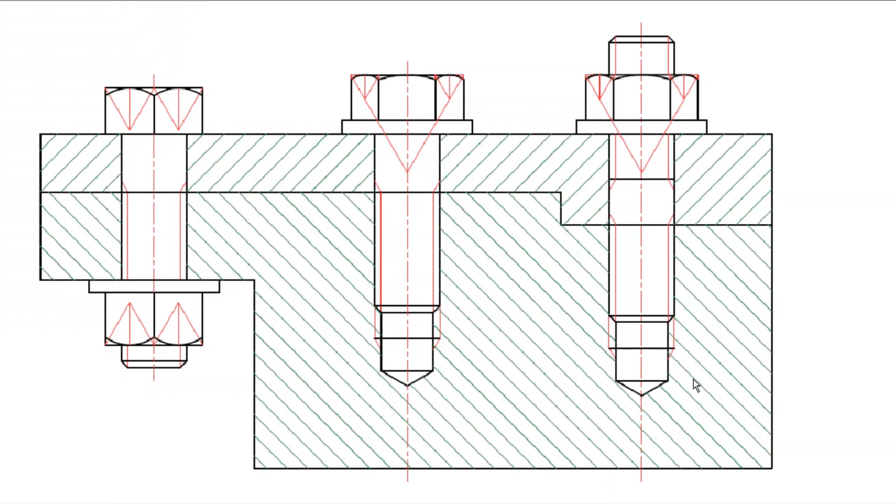And then next to it we have what we call a stud assembly, and a stud is basically like a bolt, but instead of having a bolt head on one side, it's got thread on both sides. It screws straight into metal part B, and on the other side you also have a washer and nut, and you can of course see the difference in the top views.

Now in the top view you can see that the bolt head is just a circle with a hexagon around it, outscribed, and the same here with the set bolt assembly, except you can see the washer going around it, which is bigger than the bolt head. And then next to it here we have the stud assembly.

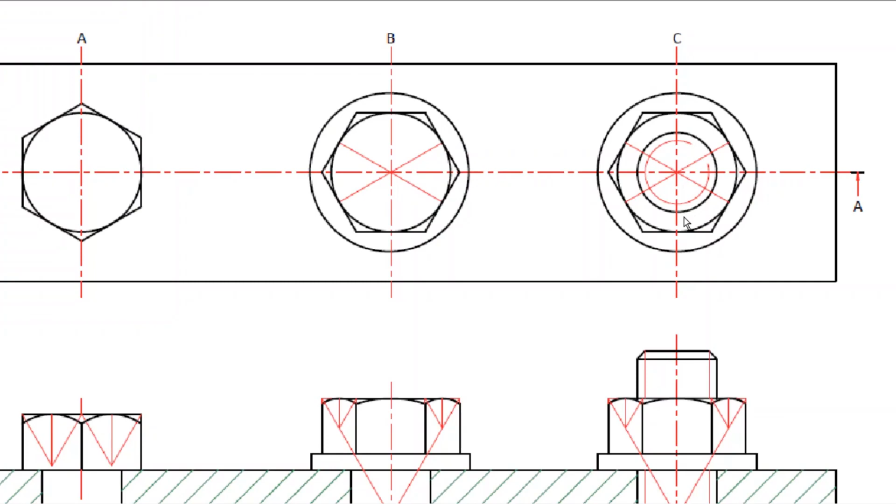If we zoom into that one, you can see the thread. And typically when you have outside thread, you have the break on the inside circle there. The break can be anywhere as long as you have it. And of course the thread is less dark than the rest of the bolt head and washer.

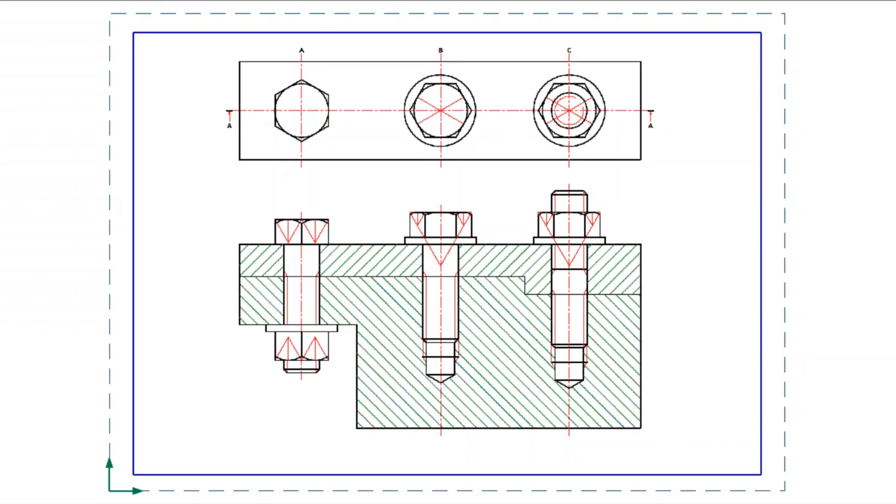So for today's exercise, we're going to be looking at an M20 bolt. That's a size with a maximum diameter of 20. But here by the 3D model, we can actually see that bolt that we're going to do today. So I've drawn just two metal parts, metal part A and B. Any size, the size of the metal doesn't actually matter there. Okay, the height of each is 15 millimeters.

And then if we take it to the front, you can see there clearly the hatch lines on each part going opposite directions. Here we have the bolt head. Then we have here the plain portion. This is the part of the bolt that actually has no thread on it. Then we have the thread going through.

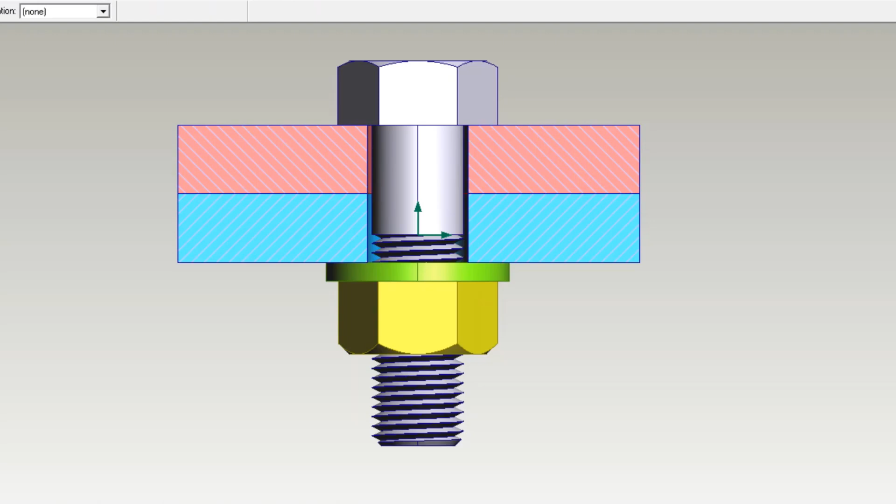Then it's covered by the washer here that's actually underneath, and the nut that is screwed on from the bottom up. And then you can see that the bolt actually rests inside a hole that is slightly bigger than the rest of the bolt. Okay, and so the bolt drops into the hole and then it's tightened from the bottom, in this case with a washer and a nut. So if we zoom around a bit, you can actually see.

Now typically when we draw a bolt assembly, or any assembly for that matter, any fastener like this one, we do not draw the fasteners cut. So even if we cut the entire object, so this could have been part of a much larger assembly, we do not actually cut the fasteners. So the washer, the bolt and the nut remain uncut.

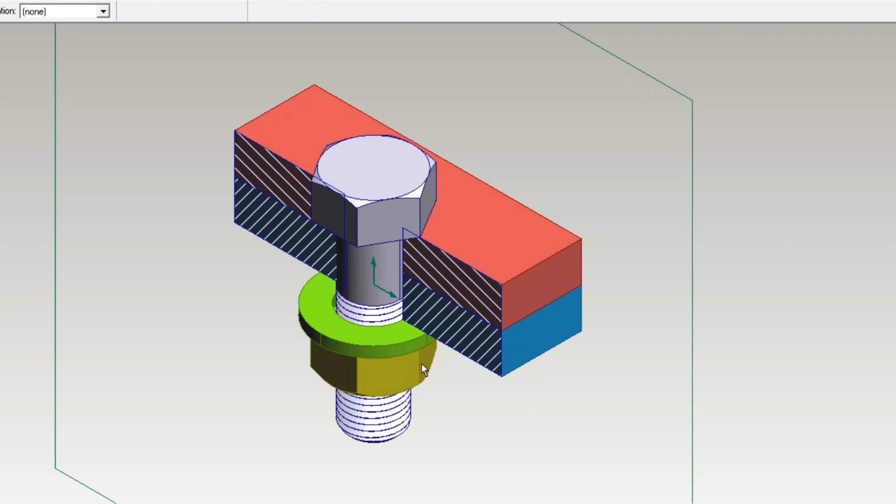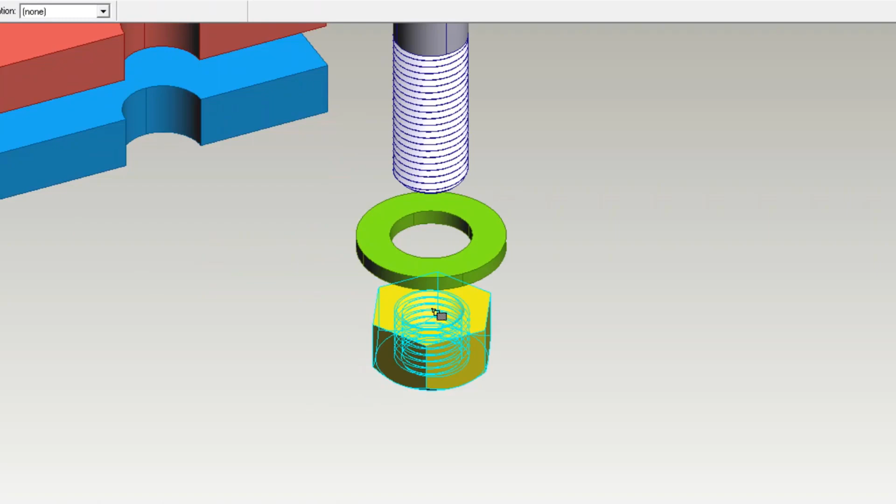So look at it from the side, you can also see there's the metal. You can see a bit of the thread disappearing behind the washer and the nut. So if we disassemble this basic assembly, you can actually see the two metal parts. A has got its hole, so basically the back of the hole is still left, and that's why you still have corners here and here. And then if we zoom in, we can actually see that the washer is basically just a flat ring,

and there's a thread inside the nut as well. You can clearly see it sticking out there. So the thread of the nut goes onto the bolt. Right, then focusing on the bolt, we can see that this is a V-type thread. You can see that it basically has a V cut into it.

Now there are different ways of doing thread. A special milling machine can be used, or a tap, okay, or it can be done on a lathe. Whatever method is employed, you do get different types of thread. So you get tapered, you get V, you get square, and so on. But understand the focus of today is not the type of thread. That will be done when helixes are done, so we're not going to be concerned about that now.

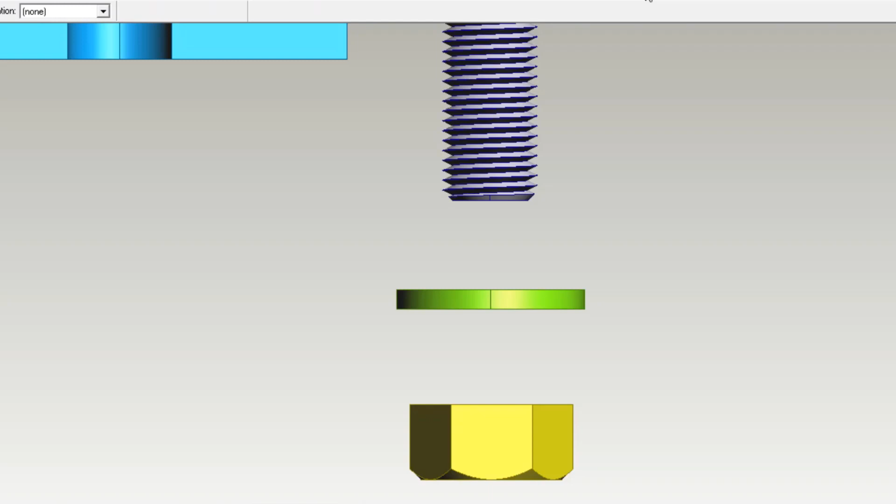So we are only going to draw the thread as a double line today. Okay, so going to the drawing page, I'm going to show you exactly how to draw a bolt. Step one, we're going to start with the center axis that's going to cover over the front and the top view. So the top view will be here, the front view below it. We're not going to draw the entire top view, basically just the washer and the bolt head.

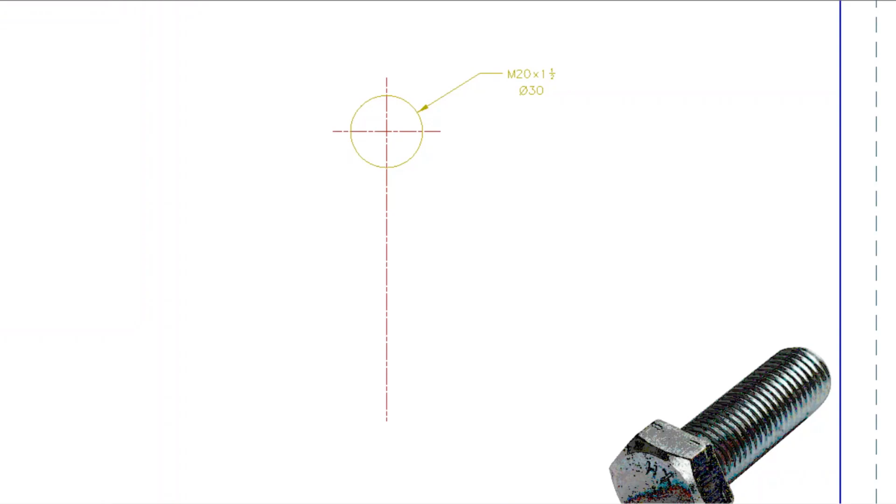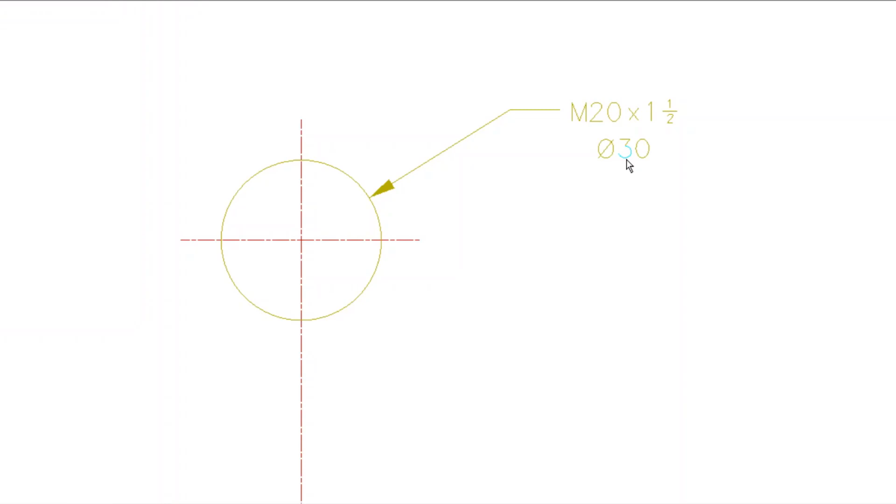Next, you want to put down the face side or the size of the bolt. Very important, remember that we are working today with an M20 bolt. So if we zoom in, you can see here that the face side of the bolt head or nut has a size of 1.5 times whatever M is. So the maximum diameter of the bolt, which is the M, is 20. If we multiply that by 1.5, we get 30. So the radius on your compass will be 15 and you construct that circle.

Then you want to draw the hexagon around that circle as a dark line, but it's outscribed. So you have to draw the hexagon around the circle and not inside. If it was inscribed like you've done before, you would put your compass down and swing it around, but this is different. All you're going to do here is take your set squares and use the 60-degree angle on the circle.

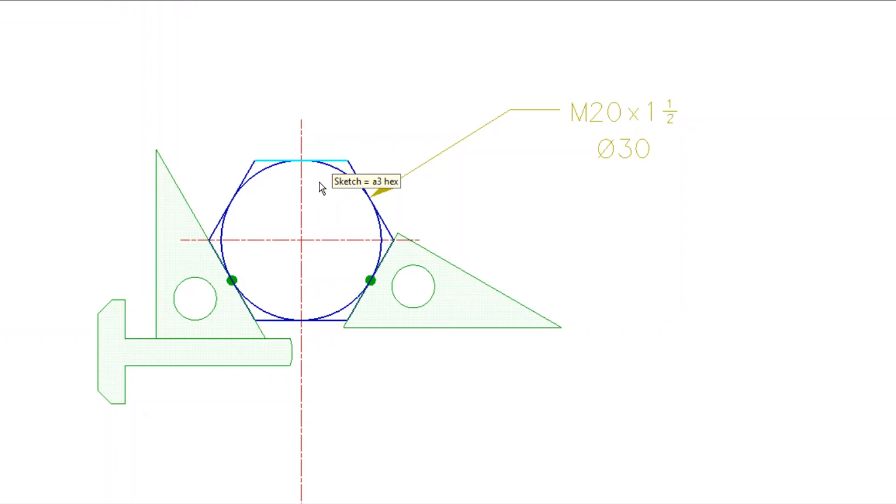When you get the set square touching the circle, at the tangent point that you see there, you simply draw a construction line, and do the same on the other side. You shift your set square on the T-square until you get the tangent on the side of the circle and you draw the construction line. Once you've constructed all sides' tangents going around, with the top and the bottom line, you simply use your T-square and move it up until it touches the circle and draw the line across as well.

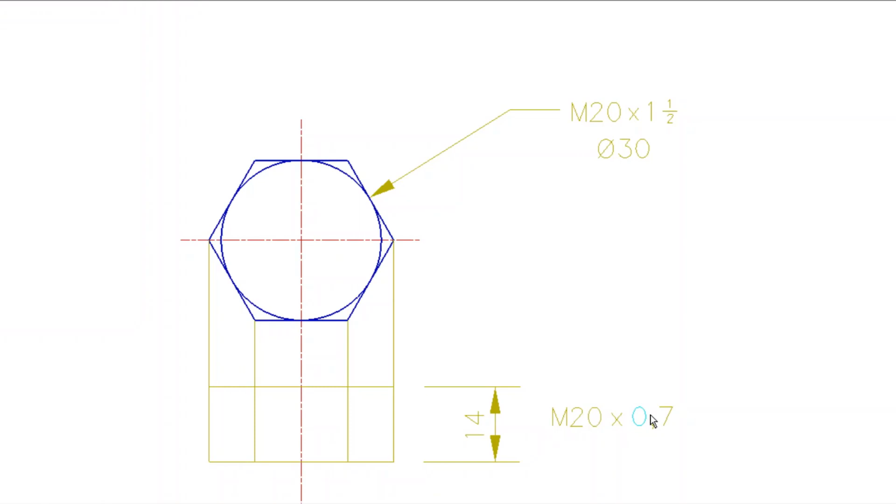Next we want to construct the height of the bolt head. To find the height of the bolt head, you have to use this formula. It's usually given in the exam as well, but in case it's not, you multiply whatever M is. If it was an M40 or M60 or M10, you would use that size, but for today's exercise we're using 20. So you multiply it by 0.7, and in this case it will give us a height of 14. That's a formula that you have to remember: M20 times 0.7, and we get 14 for the height of the bolt head.

Next we want to construct our compass points. To do that, you take the corners down. This gap you can make anything; I made mine 2 centimeters. You draw the construction lines down from the top view, the 4 points. Then you mark down a starting line, measure 14, mark the base of the bolt head, and then go to these little blocks. You see that the bolt head has been divided into 3 blocks, a big one in the middle and 2 smaller ones on the sides.

You go to the corners and connect them with construction lines across. You'll see mine is like a Y. If you go from this corner through to that corner and lengthen until you reach the center, that will give you the compass point for the arc in the middle, and these 2 smaller ones will give you the arcs on the sides. Next, you put your compass down on that center, move it up until you're at the top, and swing your compass around, and that will give you the central curve.

Then to find the small curve, you put your compass down on the compass points on the left and right side. You simply put it down, you line it up with the curve point that stopped on that corner, you swing it in, and when you reach the top, you stop. Alright, now we're almost done with the bolt head.

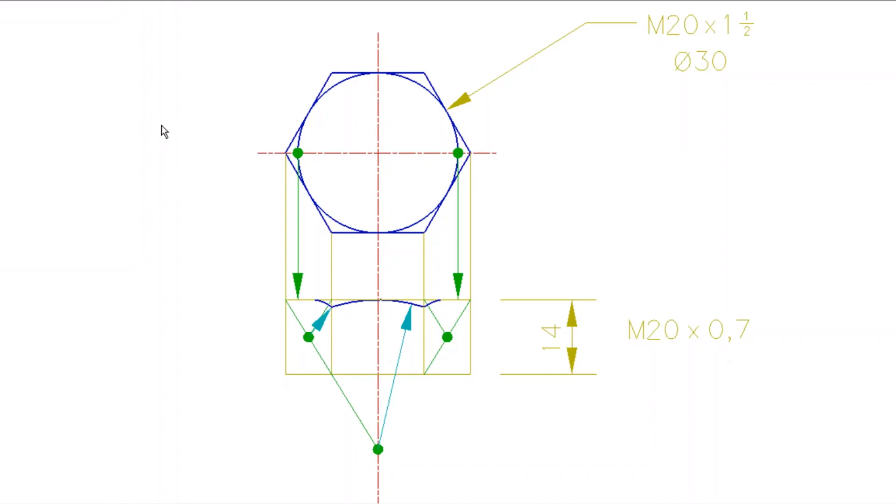To finish with the bolt head, you also have to take into account the 2 chamfers that you're going to find. So these little chamfers are to allow the socket or wrench easy access on the bolt head, so that it's not so tricky to get it on there. So you take these 2 chamfer points, you take it down, and then you are going to draw the chamfers at 30 degrees to the face side. So use your set square for that one.

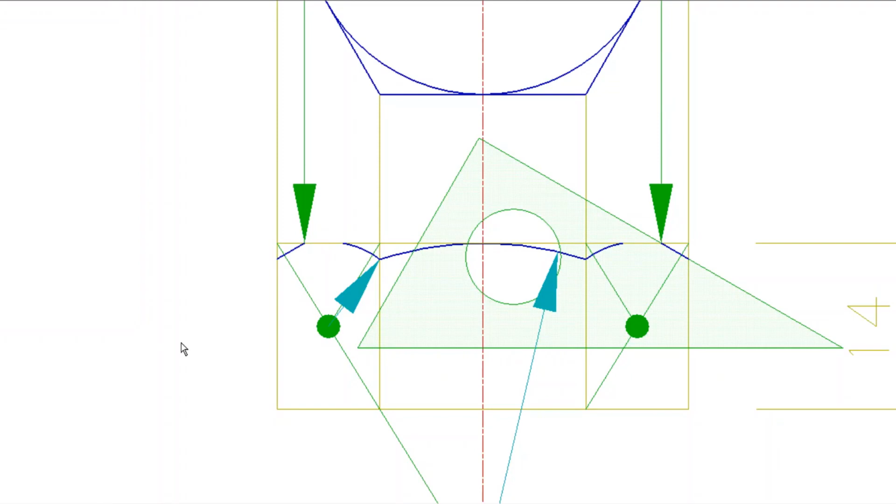So where that point is marked down, you simply put your 30-degree angle of your set square on that point, and you can immediately go and just draw it solid there on that corner. And obviously you just swing your set square around and draw it on the other side as well. Right, once you've done that, you want to go and draw the face side with the solid line. So now you can actually see it.

See there, you can see that little chamfer there. There you can see that chamfer, and there's the chamfer from the side. And then you can also just connect the rest of the corners to finish off the bolt head, and the bolt head is done.

Right, next what you want to do is mark down the maximum diameter. Like we said, it's an M20 bolt in this case. So you go from the center, and I mark 10 to each side to get the size of 20 diameter. So I just go from that point across, and you can see those little marks that I made there, and that is the mark on 20. You'll see it's supposed to be just on the right of that corner, and if it's not, then you obviously know that you've made a mistake.

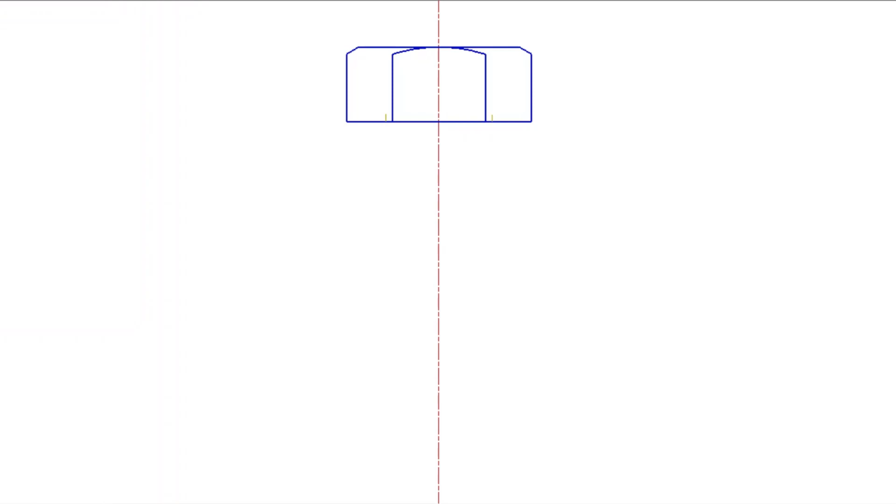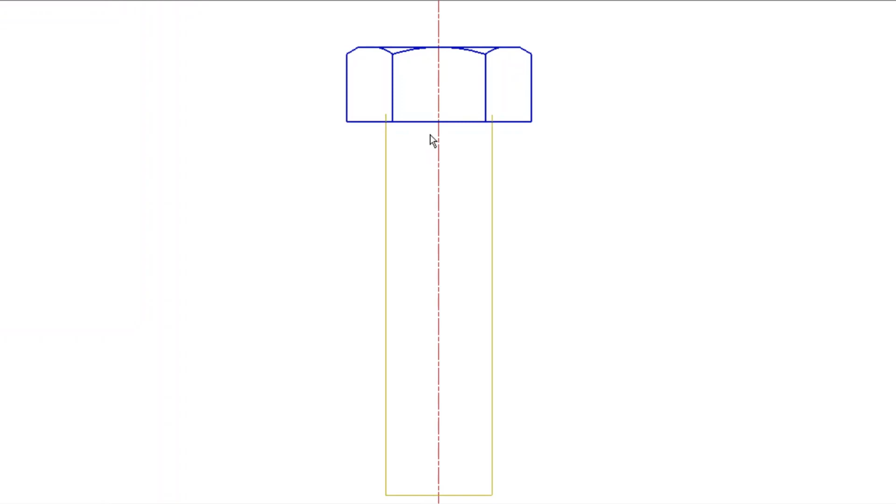Alright, next you're going to take your maximum diameter down. Now for today's exercise, we're going to make the bolt length 70. Now please keep in mind, when we're talking about bolt length, we are not talking about the length including the head. We're talking about the distance from the base of the head and the shaft going all the way to the tip. So whether I'm talking about bolt length or shaft, it's the same thing. The shaft running down is the bolt length. And that wording could be important for the exam as well.

Next, you want to go and mark down the minimum diameter. Now, in most cases in the exam, the minimum diameter is not given. Typically on a bolt packet, if you go to any hardware store and buy a packet of bolts, you'll see that it will read something like M10 minus 8H. So the H always refers to the minimum diameter of the thread.

Okay, now if it's not given, all you have to do is go to your M20 and say, what is 10% of that? Well, 10% of that would be 2. So all you then do is mark down 2 on each side to get your minimum diameter. So 20 minus 4 will give you 16 in this case. So the distance from there to there is 16. So obviously measuring from the center, it would be 8 and 8.

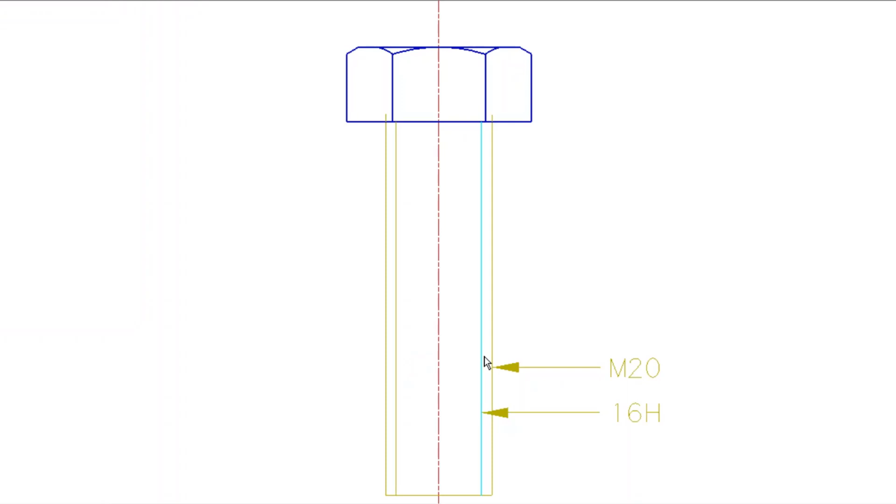Next, we want to go and draw in our tip. That tip must always be at 45 degrees. So where the minimum stops on the point, you just go at 45 degrees, stop on the side and go across. And again, you can draw that dark straight away. Next, you want to go and mark down your plain portion line. That's the line that separates the part with a thread and the part with no thread.

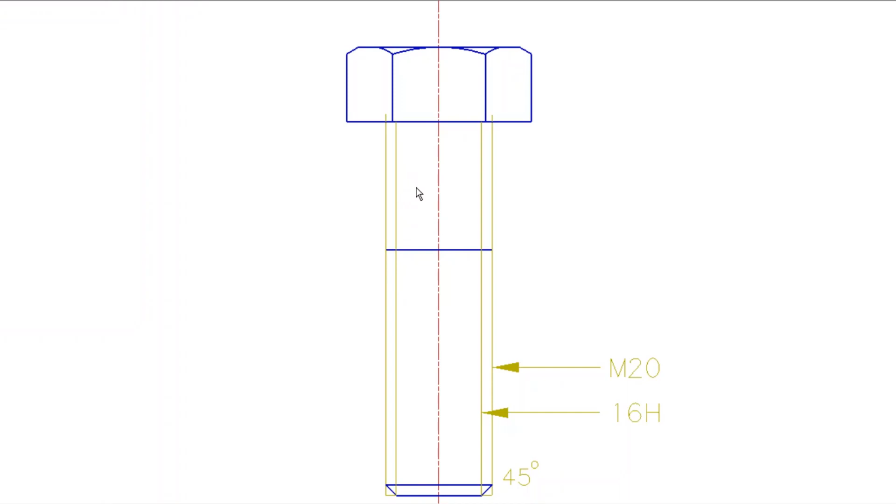Now, the plain portion line always has a length of 2m plus 6 if the bolt length is less than 100. It's very, very unlikely you'll ever get a bolt that is longer than 100. And in most cases in the exam, these bolt lengths will be given to you anyway, but just in case they won't be.

So the formula for the thread length, note I'm not saying the bolt length now, I'm saying the thread length, is 2 times m plus 6. That's the formula if it's not given. So 2 times 20 will be 40, plus 6. So the distance from there to the tip, right down to that line, is going to be 46. And what's left is the plain portion.

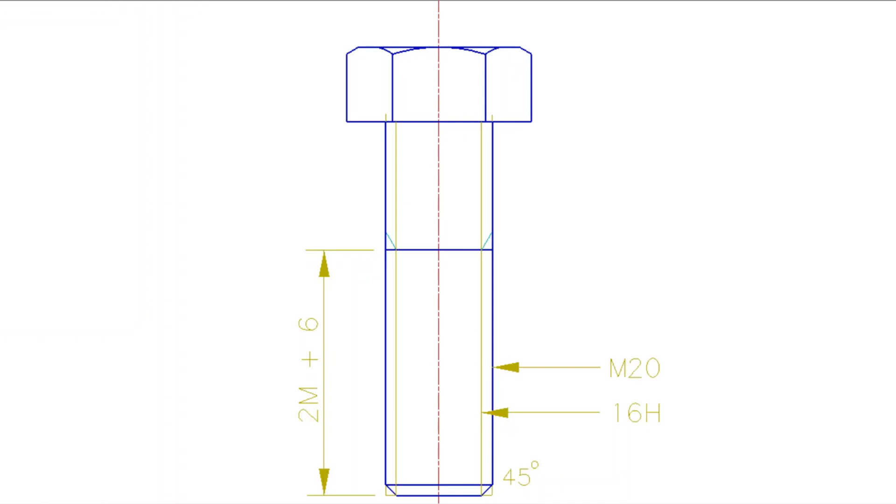Next, you can draw the outline dark as well. And then we have to go and draw in the minimum thread as well. But please take note, the minimum on the bolt has to be in between dark and light. It's not quite as dark as the dark lines, but it's not quite as light as construction. It's kind of in between.

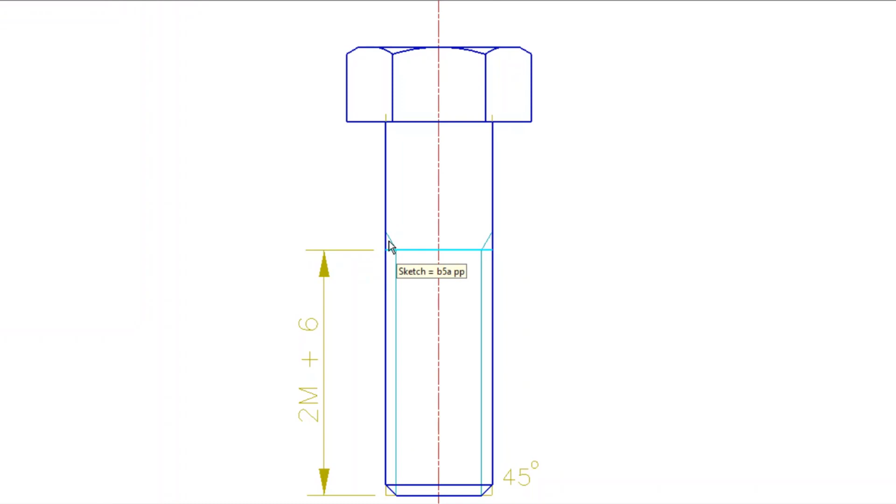So now that your bolt is left, you can actually see what it's going to look like. So there you can see the minimum thread, that distance being 2, or the diameter being 16 across. And when you reach the plain portion line, you have these little triangles that you can see here. Right? This is what we refer to as the run-out thread.

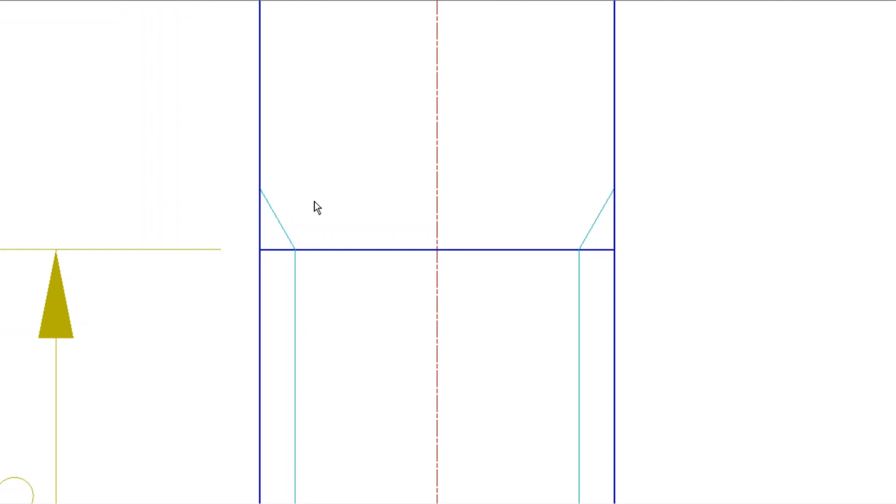That's the part where the thread is cut into the metal, but it starts running out, okay? Because if the tap screw stopped or the milling machine, you stop cutting into the metal. So this is not quite as deep as that, it's becoming more shallow. So this run-out thread is always indicated with a small triangle that's also in between dark and light, and that line has to be at 60 degrees to the length. And there our bolt is now complete.

Right, next we want to go and look at how do we actually construct a bolt when the head is the two-sided view. Remember this hexagon, if we're looking at it from this side or from the back, you can see 3 sides, so that's why we have the 3-sided view here. But you can turn this so that we can actually see 2 sides, okay? So the 3-sided view is more common, but it does sometimes happen.

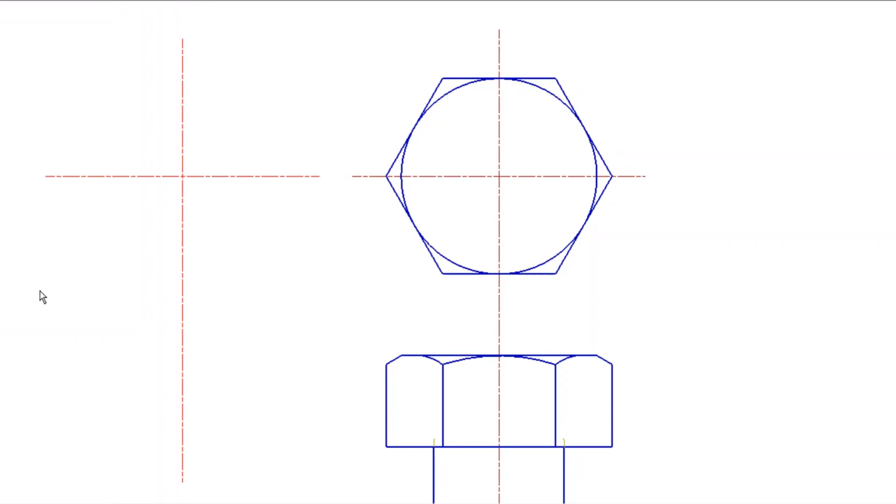So just to reconstruct what we had before, I'm just going to place all that down. So all you're going to do is you construct this again, okay? So imagine you didn't have a 3-sided view, it was like this. So you take the corners down again until it lines up. So it's the same height as you would have from the 3-sided view, obviously. But you can draw the outline solid straight away.

Then what you're going to do is you're going to go from these 3 points at the top, and you're going to go at 60 degrees from each point with your 60-degree set square, and where they meet we have our 2 compass points. Obviously we're not going to have 3 curves this time, but only 2. And then you're simply going to put your compass down, line it up with the top, draw the curve, repeat on the right side, and draw the corner in the middle, and your 2-sided view is done. So the 2-sided view is actually a little bit easier than the 3-sided view, and that's also why it normally counts less than that one.

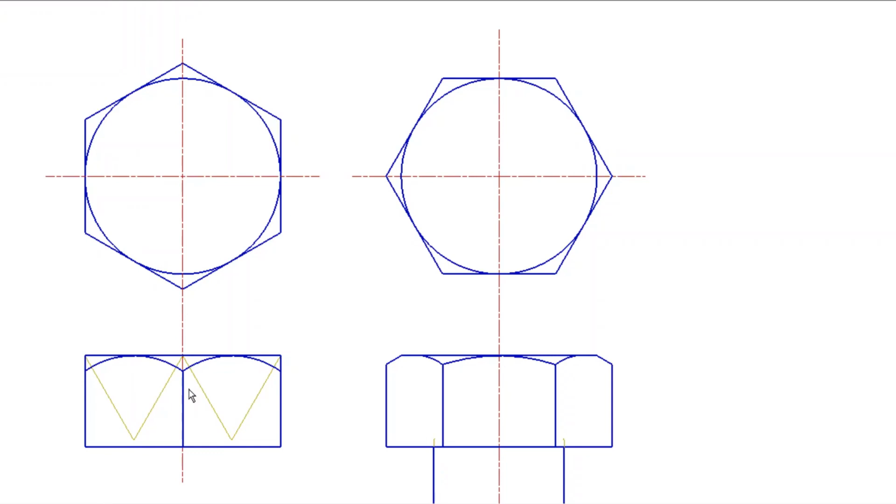Right, now to finish off the exercise, we're actually going to be adding the washer and the nuts on the bottom side. And we're also going to be adding the part metal A and the part metal B, okay, that we are actually joining. So it's a basic assembly. So to do that, I have redrawn the bolts for now as yellow construction lines, just to make it much lighter. Please take into account that the dark blue are dark lines.

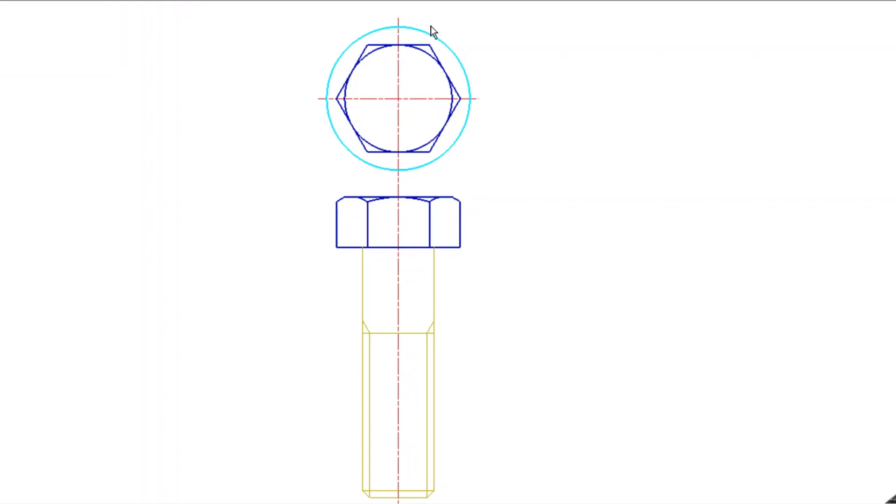Okay. So to start, we're going to add the washer in the top view. So there you can see that the washer is going round the bolt head in the top view. Okay. And this washer always has a diameter 2 times M. So if M is 20, the washer has a diameter of 40. If M is 15, then the washer has a diameter of 30, and so on. But since we're working with M20, it's going to have a radius of 20 or diameter of 40, and again use the same center as the bolt head.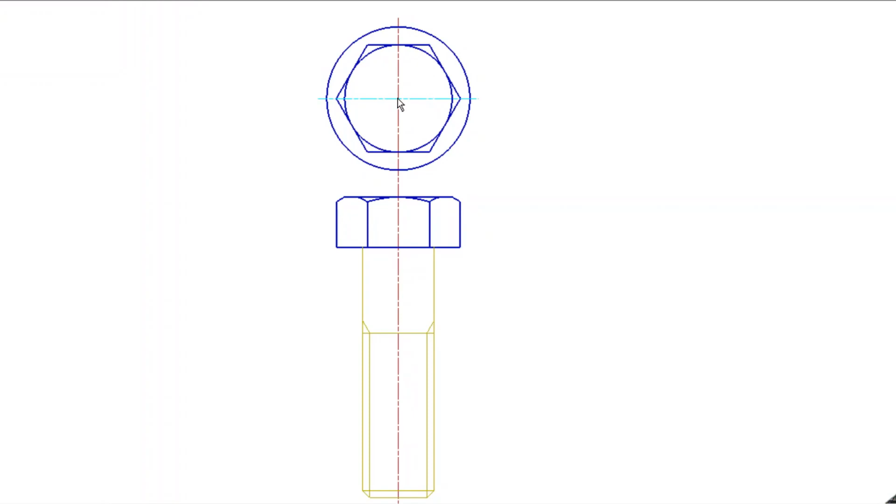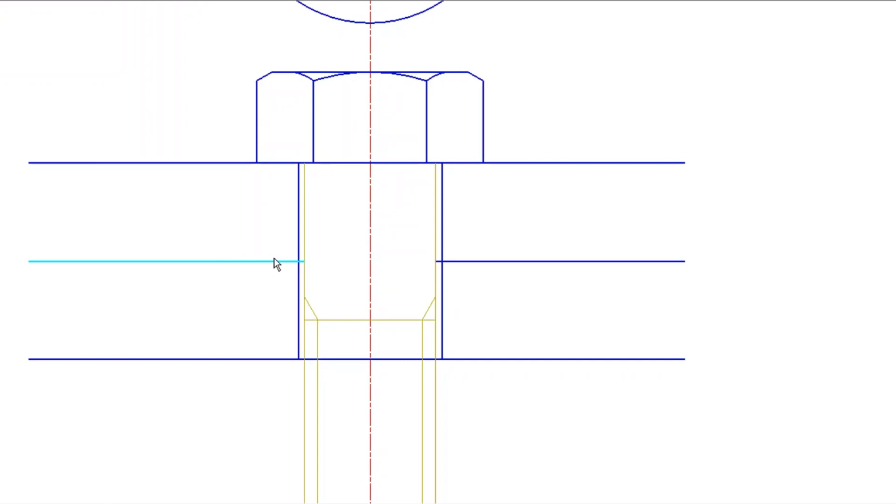Next, we're going to mark down our 2 sheets of metal. So if I zoom in here, we're going to make each height 15 millimeters. So the height from the base of the bolt head is 15, and the second metal part is also 15. And please take note that the line is going to stop when it hits the bolt. So you can see here that the line doesn't go over the bolt, it actually goes around the back, and that's why the bolt is covering the corner or edge where the 2 metal parts meet.

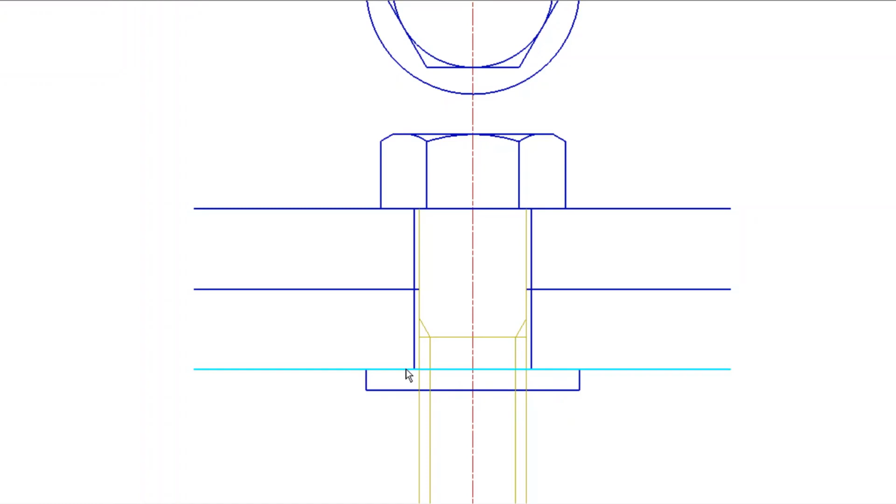Now the reason why the bottom line is solid is because this line will actually be used for the washer, because remember the washer is going to keep its outline, and there you can see it. So the washer is going to cover that area of the thread, and that's why that line there is going to be solid.

Now again, to draw the washer, remember that the washer has a size of 40. So the rule is you can simply take that 40 from your top view and project it down, and you can mark it there. Or you can go from your center and simply measure 20 to each side. Then how thick or high must the washer be? That's always 10% of the diameter. Or if you will, M20 times 0,2.

So if the washer has a diameter of 50, then that will be 5. If the washer has a diameter of 80, then that will be 8. If the washer has a diameter of 20, then that will be 2. So in this case, that is a diameter of 40, so we made it 4. So the washer is fairly easy to remember.

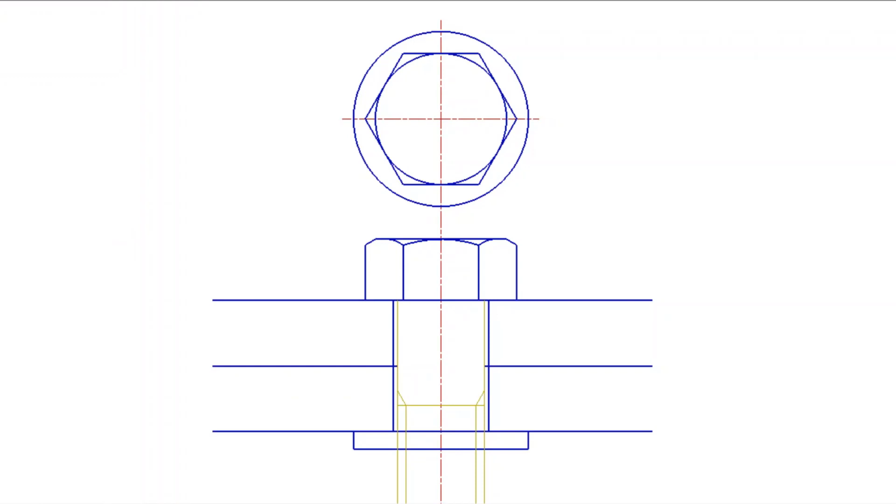Next, we want to go and draw in our nut. Now you can see that the nut is exactly the same design as the bolt head. So we're going to stick with 3-sided again. You can see it's drawn exactly the same. So the same method you apply to draw the bolt head, you're going to apply to do the nut, with one difference: the bolt head has a height of 0,7 times m.

So you take your calculator and you multiply 0,7 times 20, while for the nut, the distance from the base of the nut to the end of the nut, that height there is 0,8 times m. So it's slightly higher than the bolt head, and that's going to work out to 16. So the bolt head is 14 and the nut is 16.

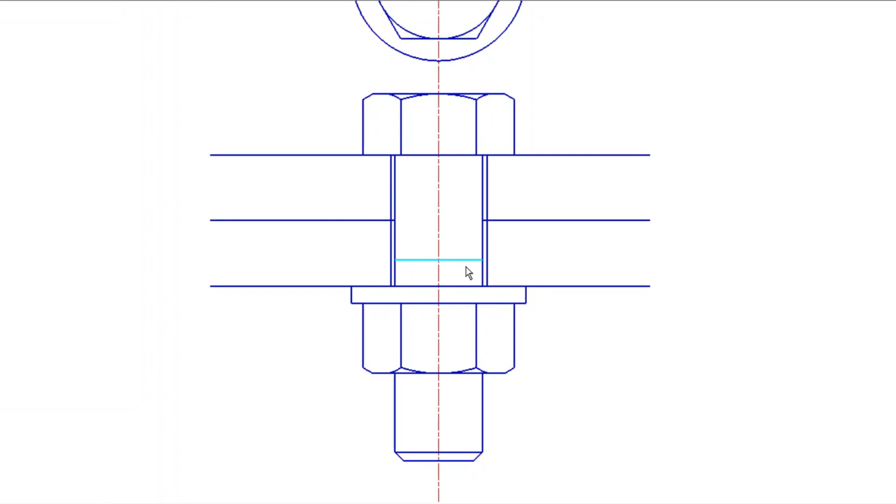Now normally, when you get this far, you would actually go and draw your shaft solid. So you can see there's the shaft, there's the plain portion line, there's the tip, there's the outside, and after that you would add your minimum thread as well and the run out. So there you can see the run out going up, it disappears behind the nut, disappears behind the washer, and it comes out the other end until the plain portion line, and then at 60 degrees.

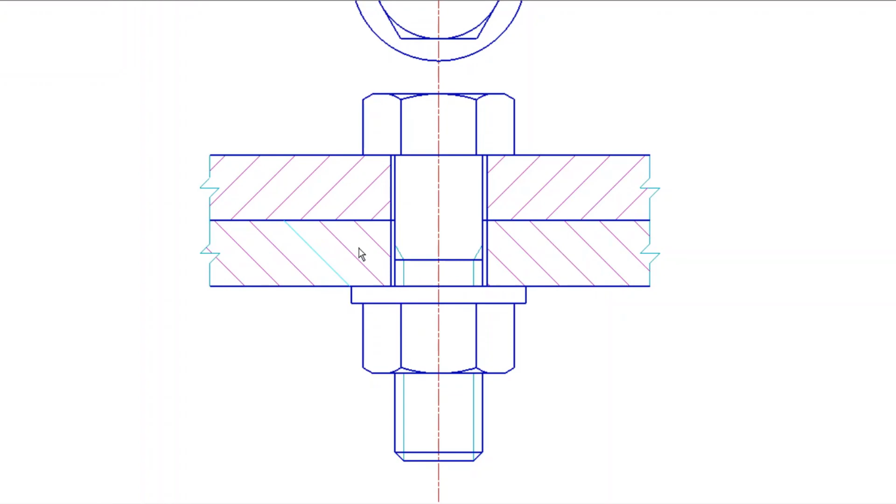Same on this side. And then on the metal, I don't have a specific length for it, so I've just added continuations here to indicate that the metal is actually carrying on. Then, of course, we want to add some hatching on the metal. So even though the entire view has been cut, we technically only add hatching to the metal parts A and B, in opposite directions, because there are 2 different sheets of metal. So this one goes to the right and that one goes to the left, both at 45 degrees. Take note, this is the same part, therefore it gets hatched the same way, even though it's in different areas.

Alright, so just to recap, starting from the top, the face side of the bolt head and nut has a size of 1.5 times m, and in this case it gave us 30. Then the washer that goes around it is 2 times m, so that gave us a diameter of 40 or radius 20. The bolt head has a height of 0,7 times m. Each sheet of metal A and B has a height of 15 on this exercise. The runout thread is at 60 degrees, while the tip is at 45 degrees. And it has to be those angles.

Then the washer, like I said, has a diameter taken from the top view, and the thickness is 10% of that, or if you will, M20 times 0,2. So that's the formula. The 0,2 is always that. Then the nut has a height of m times 0,8.

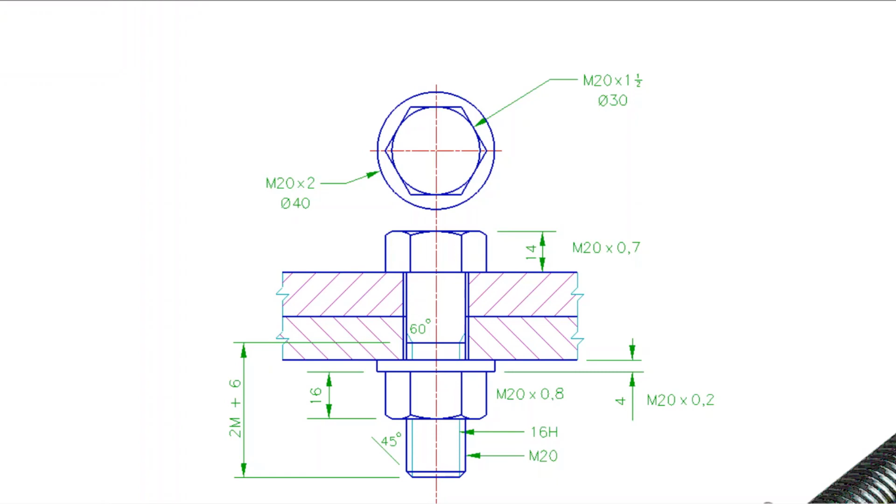In this case it gives us 16, and then the maximum thread is 20, and the minimum thread is 10% less each side, and then the distance from the tip to the plain portion, in other words, the thread, is 2m plus 6. So in this case, 2 times 20 plus 6 gives us 46. Please take a capture of this. You will definitely need these formulas at a later stage as well.